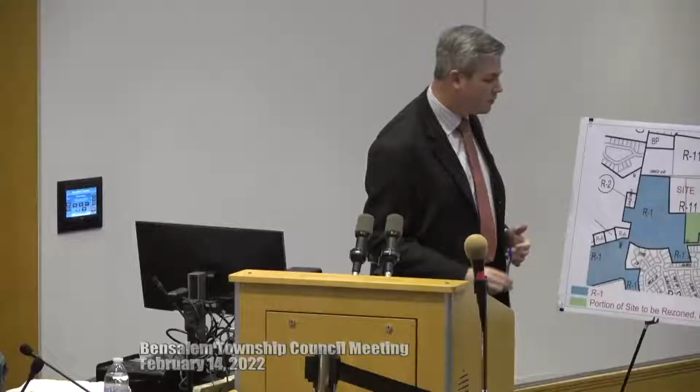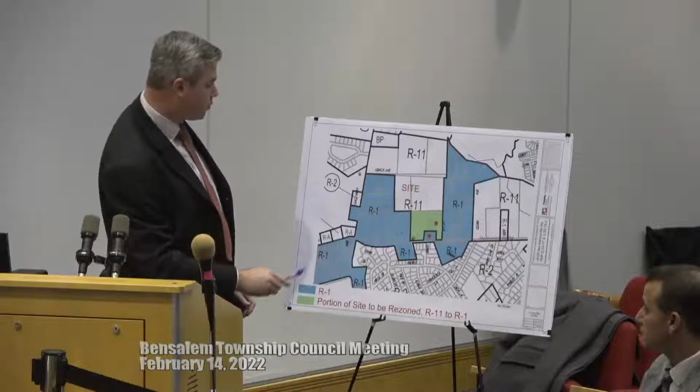Okay, so Matt, you can explain to us what you're doing with the zoning. It's a small piece that needs to be changed, just so to orient council to the property: it's 4020 Mechanicsville Road. It's actually these two parcels outlined in green as the larger parcel, and this green stripe parcel is the smaller one. The larger site, everything in blue, is zoned R1, including the smaller parcel. The larger parcel is zoned R11, consistent with the zoning to the north, where Grace Avenue goes. Our proposal is to rezone this entire parcel, consolidate them into one parcel, and rezone it completely as R1.

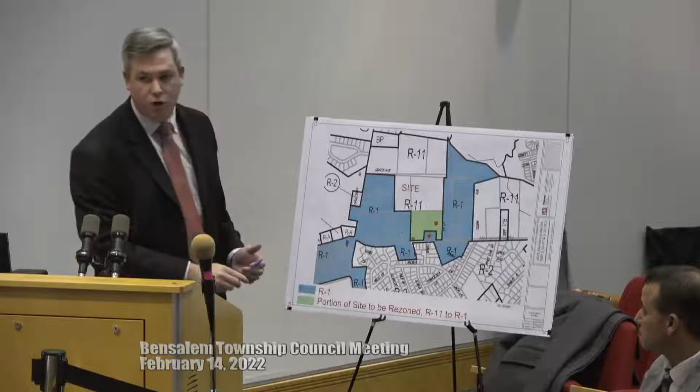And what you can see here is that there is a significant amount of R1 zoning already in the direct area. The properties adjacent to it, across the street, down here, over here, are all R1. So we believe it makes sense from a perspective of good community planning to have consolidated single zoning of R1 on these parcels as they're being developed.

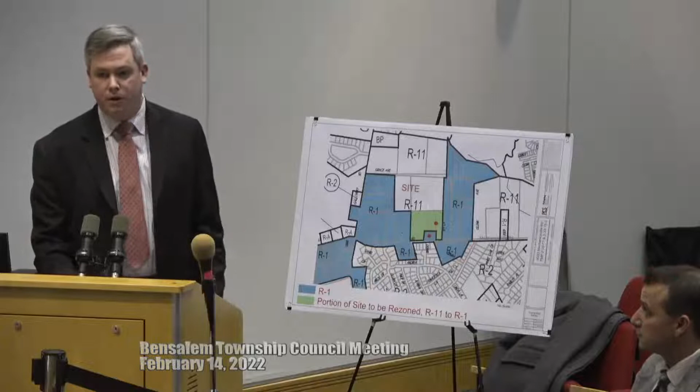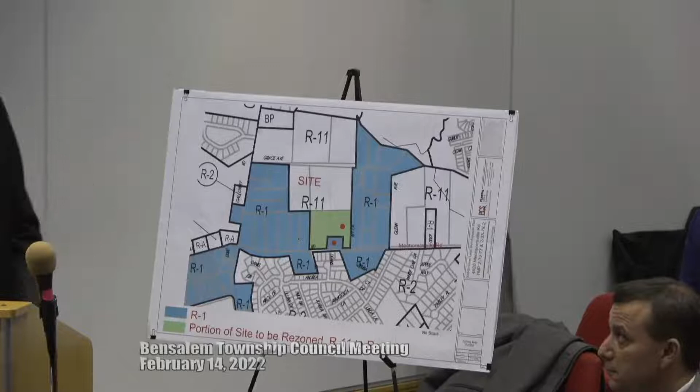And that will allow us to subdivide the property into 7 lots, which is shown on the plan. Right now you have split zoning - R1 and R11 on the site. This would consolidate them into one parcel, making it R1 zoning across the board.

So that, in a nutshell, is the rezoning case, and that leads into what the subdivision allows for. Can I ask a question since you're referring to that? Sure, go back to the zoning itself, if you would.

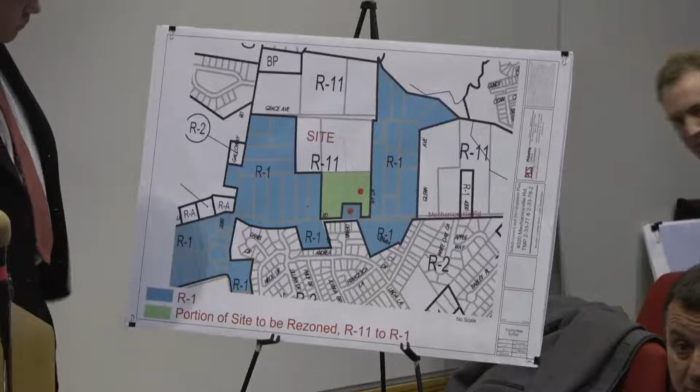I understand and agree with what you're saying. However, if you take the northern part, which is R11, and this middle part, also R11, and continue that down to the green part, which would now possibly become R1 - if that R11 area were to maintain itself as R11, and that little 1-acre area also stayed R11, that would have consistency going from north to south. Am I correct in that?

I think you're correct in that, but when I look at it, Mechanicsville Road is a major road here, and you would essentially have consistent zoning all across this side of Mechanicsville Road at that point, both the adjacent blue and the blue in the center, which is now R1.

That's correct. So the green, which reaches Mechanicsville Road around that other property on both sides - right now this is R11, so you want to make all that green R1. Along with that little centerpiece, yep. So then that whole piece that is green now would turn blue, and you'd have a blue line straight across.

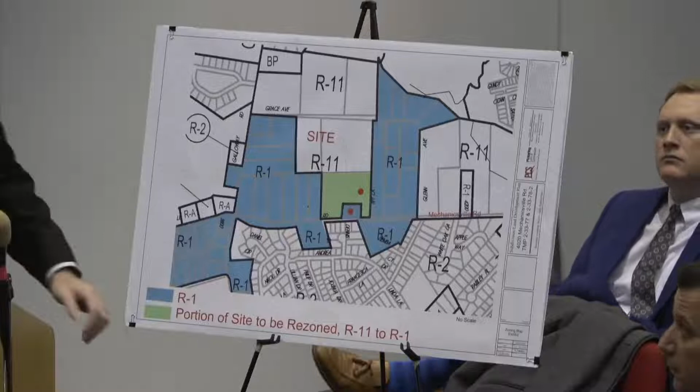And how big is the entire piece? Mark, what's the total acreage? 7.3 acres. Okay, so it's a 1-acre piece, and then so everything along Mechanicsville Road from Glen Avenue all the way to Galloway would be R1, going back to where it was.

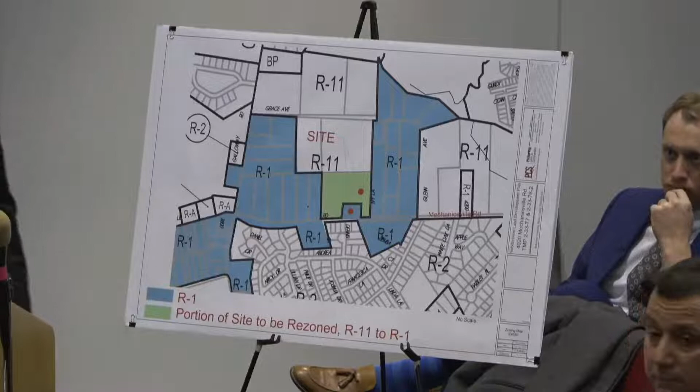The properties on Grace Avenue would then be an R11 zoning classification. Okay, I guess my reason for asking that is from a practical or pragmatic point of view.

Relative to the shape of each individual lot - if it's R1, it's an 80-foot front, where R11 gives you a 100-foot frontage. Correct. Now it would probably eliminate one of the lots. Correct. However, aesthetically, or realistically, it would be more proportional to a lot.

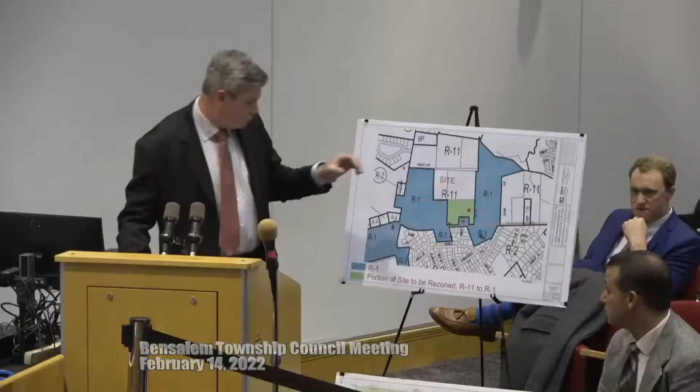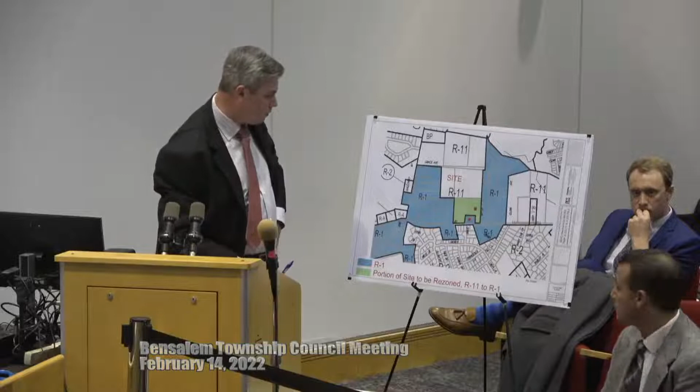Relative to it going - how far do those lots go back? Over 500 feet. So 500 feet makes more sense with 80 feet wide versus other proportions. If you look at the parcels adjacent to it, they're about 80 feet in width also, so these lots would now be consistent with what's currently on Mechanicsville Road.

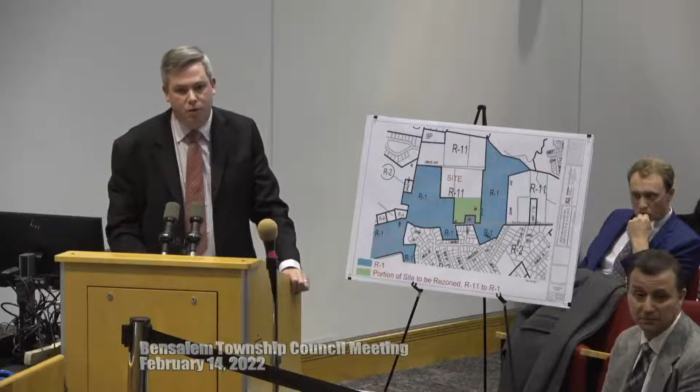I think aesthetically it's got to go one way or the other - either everything's zoned R11 or everything's zoned R1. We prefer R1; it provides us with the 7-lot subdivision and I think it matches the character of the neighborhood. All right, you've answered my question, thank you.

So that's eventually the subdivision plan - it's by-right zoning, so from a zoning perspective no variances are required. It allows for, as Mr. Kisselbeck noted, an 80-foot lot width and almost 500 feet deep lots.

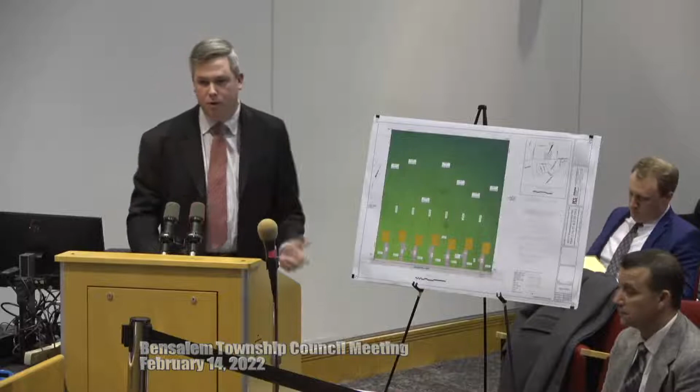That's all still permitted within our zoning requirements, doesn't trigger any variances, the additional impervious, but we thought it was a nice feature to make sure there's no parking on Mechanicsville Road. A couple of people had asked about that. This way you're facing forward when coming out on Mechanicsville Road, so we don't want cars backing out onto it. This provides an opportunity for people to park and turn around so they're facing the right direction, and also prevents parking along the street.

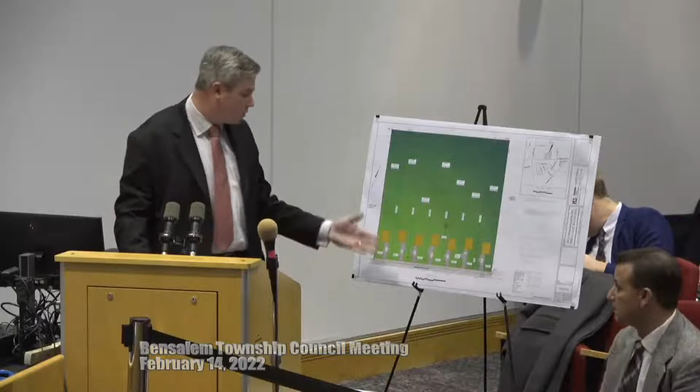So each lot would be approximately 80 by 500? Yes, it's even 550 almost. Okay, so 80 by 500.

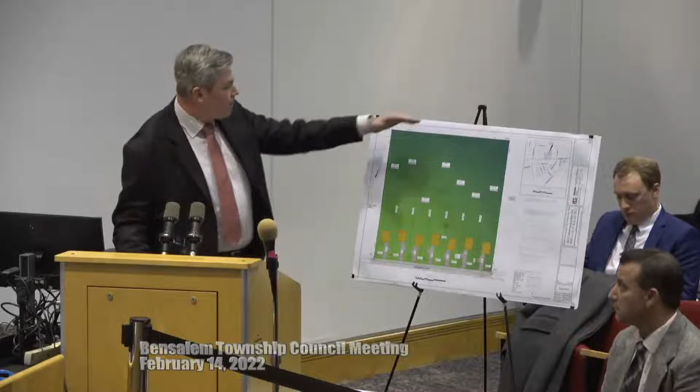Now, there's a lot of vegetation to the rear of the property. We're not disturbing beyond the zoning ordinance requirements, but there is a limit to the amount of trees you can take down on the overall lot. One of the comments in the T&M letter was to provide a deed restriction to make sure no more than the allotted trees are taken down. So we're going to do that, and we'll make sure that deed restriction is incorporated. So you'll see no more than 50% disturbance of the existing trees on the site, and it'll be buffered very nicely to the north along Grace Avenue.

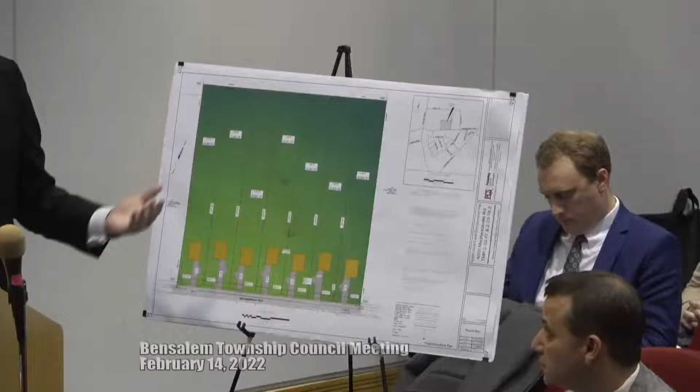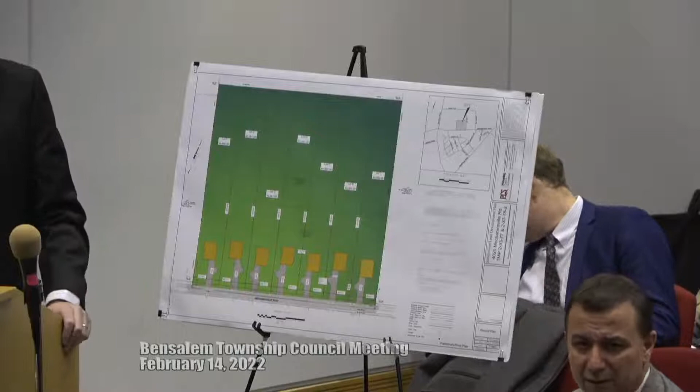Could it also be put in an agreement that there would be so many feet back that could not be disturbed, as opposed to just a percentage amount of 50% of the trees? I'm sure we could accommodate that. The plan right now only shows disturbance on the front half, but we'd be willing to agree to a restriction to that end. The zoning ordinance only requires the percentage, but with a buffer yard, we're providing almost 250 feet before there's any disturbance, I think.

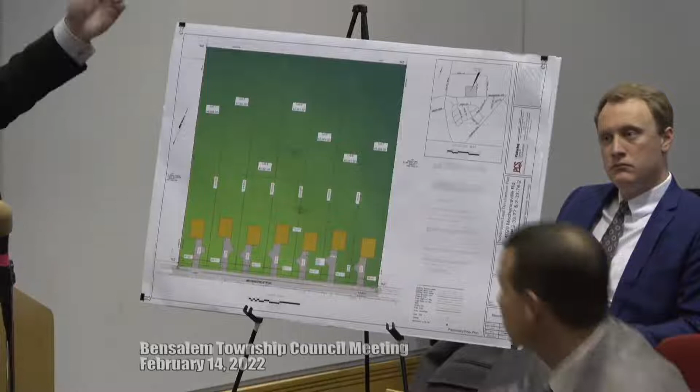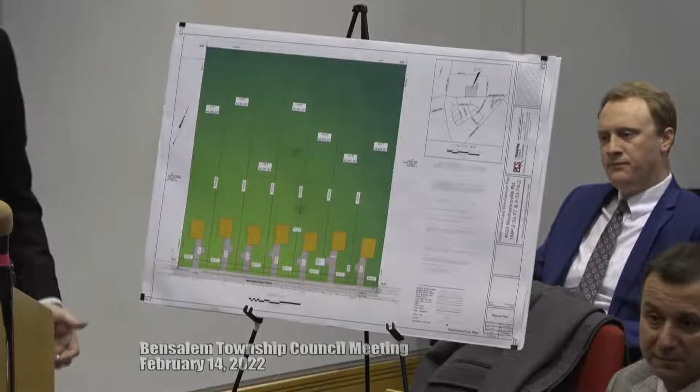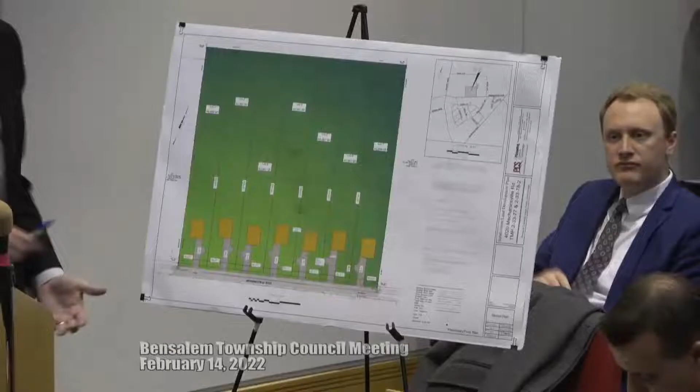Anything else? As it relates to the T&M letter, the latest review letter we had, dated November 10th, 2021, we'll comply with all of the review letters. Every issue we're willing to address. We do have 2 waiver requests, for curbs and sidewalks along Mechanicsville Road. There are no existing curbing or sidewalk along that portion of Mechanicsville Road, so it really wouldn't enhance anything, but we would obviously pay the required fee in lieu of those.

So as determined by our township engineer, you would be paying a fee in lieu of curbs and sidewalks for the future. Correct. Can I make a comment?

Yes, Stacy, go ahead. Being a mother of 2 children who walk on a street that has no curbs or sidewalks, and knowing that recently one of the developments put a sidewalk in for children in another development so they're not standing on the road or in dirt. Many people are walking and many complain about not having sidewalks, so it would be nice to see that starting to happen, especially if there's going to be children here needing a place to stand rather than standing in the driveway, even just to visit their neighbors. I think it would be the time to start.

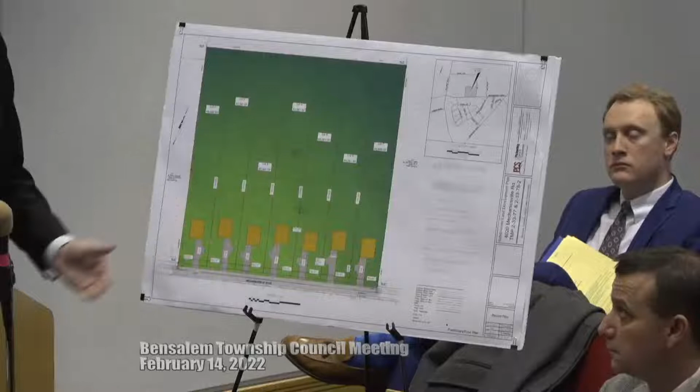It's not just one, it's seven, and I think it would be a good time to start seeing that as we progress along. Certainly, and just because these sidewalks would not connect anywhere, that was part of our consideration in stepping the houses back a little bit, so that pedestrians walking along the road have plenty of opportunity to not be right along the shoulder. But they'll be walking on your grass.

Understood, so I'd rather have somebody walk on a sidewalk than on grass. Is it possible to put curbs and sidewalks if chosen, since you're paying for them anyway? Sidewalks and curbs create more drainage problems. I'm concerned about the drainage. You need a drainage system, so it just compounds itself.

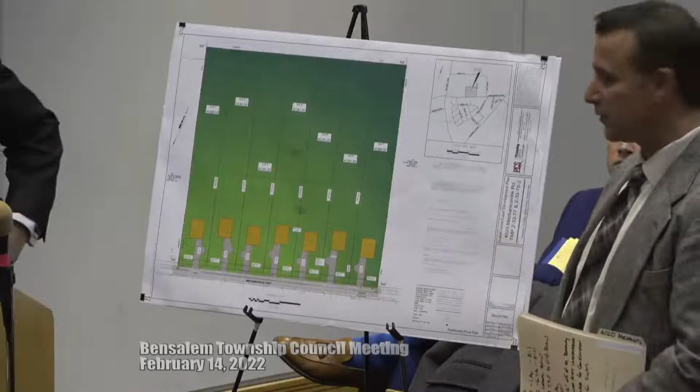Sidewalks, we can definitely look at that. I'm getting the okay from my client, they're willing to remove that waiver. They'll put the sidewalks in, Mr. Chairman, at least, and then we're still asking for the waiver from the curbs.

Even if they don't have to walk anywhere, like Ms. Champion said, at least if they have children standing for the bus. If that's the preference of the township to have those sidewalks, then we're happy to put them in, and we'll do the fee in lieu for the curbing.

That's correct. Okay, so is there anything under the zoning ordinance, under subdivision, that's all? There's no other, yeah, we will comply. We either have addressed in our revised plan or will address in a future revised plan all of those comments. Most of those are stormwater management things, just minor calculations, and we're committed to work with the township engineer to make sure they are compliant with the zoning ordinance.

As far as the stormwater management, once we get to it, it looks like you're reducing most of the flows at the site from what they are now. Correct. So you're complying with that section in its entirety, everything from 1 to 30?

And then we go into stormwater management, so they're all one plan, they all comply, right? Yes, the whole letter is a will-comply. Is that correct, Bill? Yes, Mr. Knowles, the only waiver is the curb, and everything else is a fee in lieu for that. All else will comply, so we feel that at this time it's able to be considered for preliminary and final approval, with the revisions to be made at final plan approval.

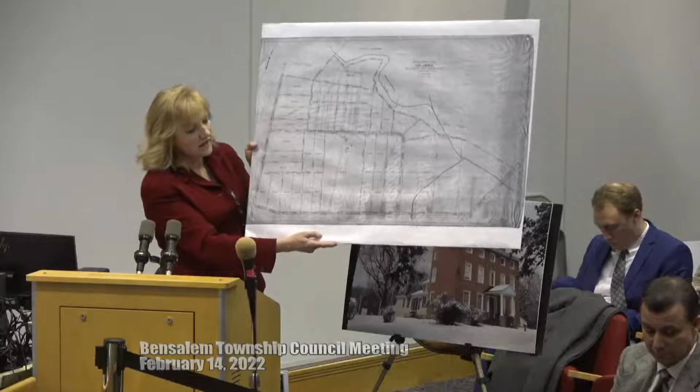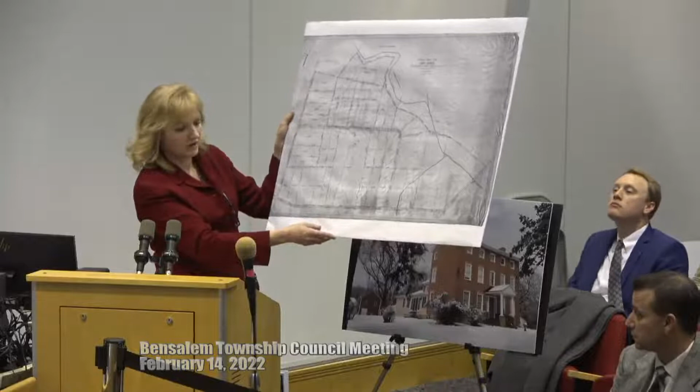And my grandfather, he had the sign on the front. That's why the address was 3972 Mechanicsville Road. That was the entrance of the lane. And this is what the lane looks like today, still a natural setting.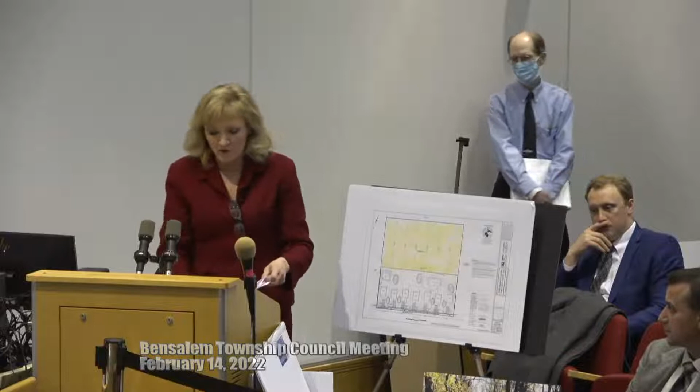Now, with the zoning, the property is zoned R11, and if you look in your booklet - I know he mentioned many of the front properties are R1, but many of the rear and to the side properties are still R11. The R11 residential statement of purpose says that R11 districts are designed to provide low to medium density housing, et cetera. They provide for the preservation of natural resources and environmental features that are unique to each R11 district, consistent with the section of this chapter, and to provide an adequate buffer between each R11 community and the surrounding districts. The R11 district recognizes the need to preserve open space and environmental resources for residents.

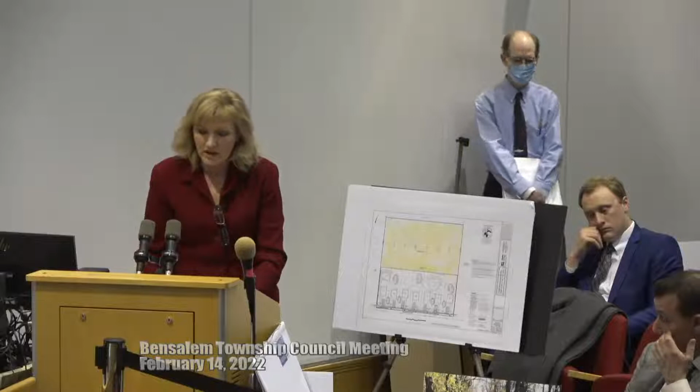So I am against subdividing the original lot that was my aunt's property, which was given to her when she got married in the 50s from my grandparents. I'm not against maybe just zoning the front half where the houses are R1, along with my former aunt's property, and maintaining - here he has his line of disturbance.

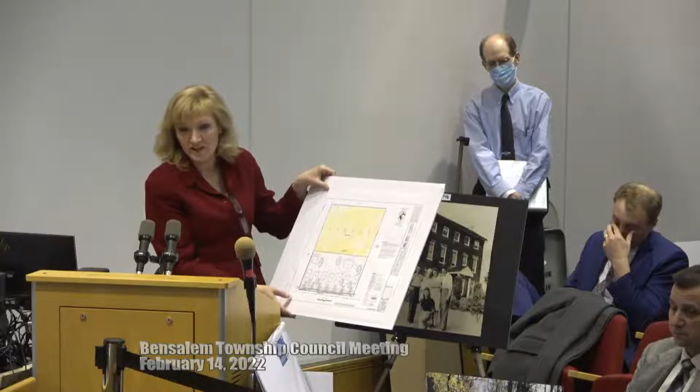Yeah, that's what it said - limits of disturbance. So as we know, houses in Bensalem sell with land. Look at Justin Circle, look at Derby Lane, which was the most recent development, and they get the high price. So I feel it's important to keep this remainder part R11.

It could be donated as preserved open space to the township, or it could be subdivided right here. And I don't think it was mentioned that in the developer's plans he's calling for an HOA. So with this sort of property, it will be very expensive for all the homeowners, constantly giving into the homeowners association to maintain this. It's also mentioned that the township would be inspecting it every year. Well, if they're going to be inspecting it, why not just donate this as preserved open space to the township? They would have access through my historic driveway easement.

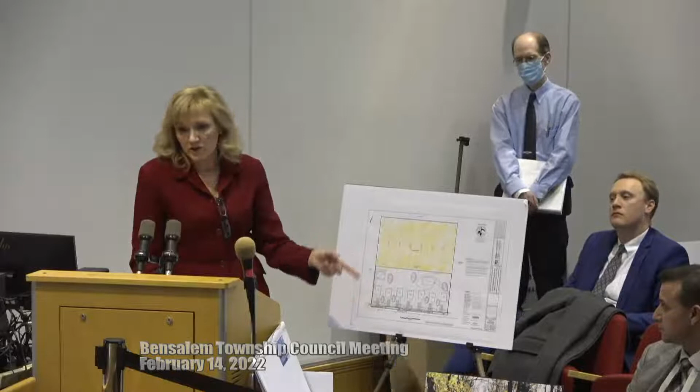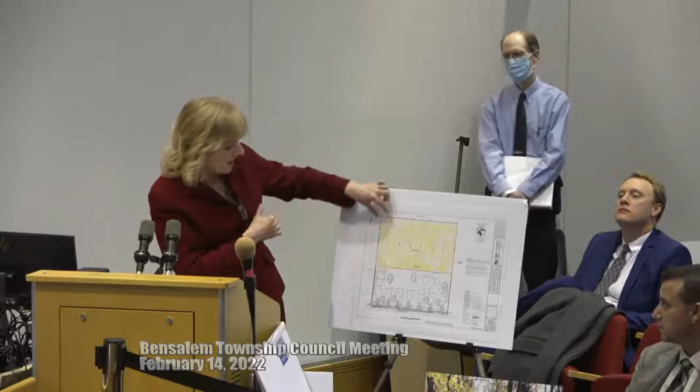And otherwise, I don't really see a homeowner - they usually buy a house, you pay for the house, you pay your taxes. They're not going to be interested in a hefty HOA fee trying to maintain the woodlands. Many homeowners do not want the responsibility of big old trees and maintaining them. What if one tree on the skinny toothpick lot falls? It just sounds like it could lead to a lot of issues in the future.

As opposed to just subdividing the front R1 and leaving the back half R11, which ties in with the whole quality to the R11 status. So yeah, I think that's it.

Really? Yeah, that was a comment, I think, originally. The only common elements are going to be the stormwater management controls. They're going to be owned by the individual lot owners. So the lot owners will have to pay to maintain the big old trees, and they're not going to be allowed to - there's going to be deed restrictions not allowing them to disturb those trees. Then who maintains the trees? Well, each homeowner would have to, yeah.

Will that be in the deed? So what if it becomes neglected? It's like, same as if anybody owns a property parcel, they're not required to maintain their property... yeah, but even this, like, the shape of the toothpick.

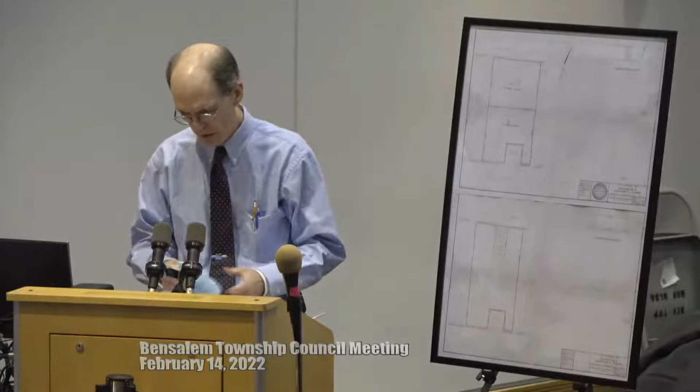Is there, sir, you want to make a comment? And you can identify yourself for the record. Yes, sir, I will. Good evening, council. My name is Robert Homolka, and I reside at 3213 Whitney Court in beautiful Bensalem, PA.

Currently, I'm against the project as it stands. As a current member and former president of the Historical Society of Bensalem, I was contacted by Ms. Roman to assist her in filing for a National Register of Historic Places status for her historic home at 3981 Grace Avenue, which is directly behind the applicant's property. During the research process of the history of her home, some documents turned up directly impacting the subdivision of the applicant's property at 4020 Mechanicsville Road.

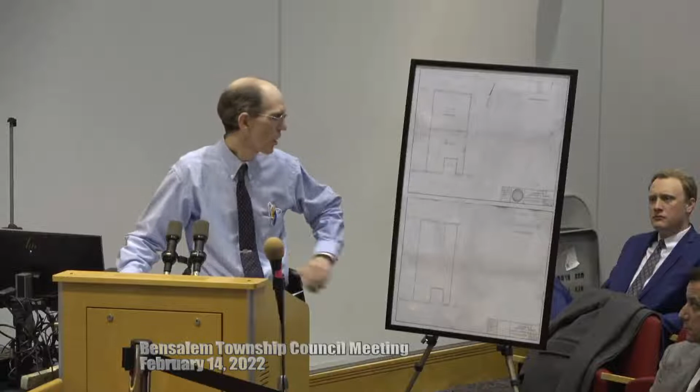Namely, Ms. Roman appears to have an easement directly across the applicant's property. This easement is not reflected on the current subdivision plans brought before council here tonight by the applicant. In fact, Ms. Roman has filed a quiet title action complaint with Bucks County Court. It appears Ms. Roman has legal and historical standing concerning this easement based on the documents at hand. These documents are maps created in 1983 that clearly show there is an easement across the applicant's property, and you had those in your handouts that Ms. Roman gave you tonight—these particular maps.

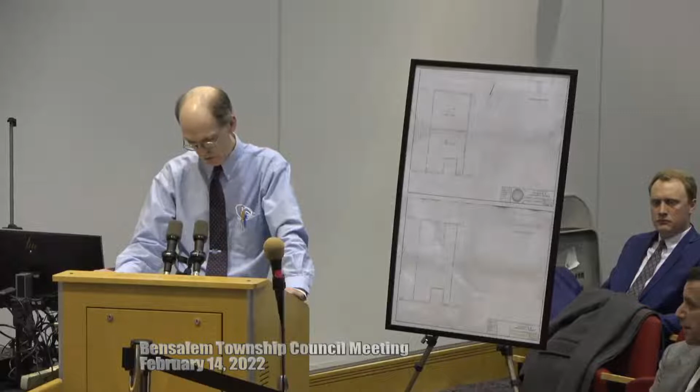The easement in brief is a gravel driveway, often referred to as the lane or Green Lane by the Roman family since the 1940s, leading to their farm across the applicant's property. The maps presented here tonight from 1983 clearly note the easement in question—there's a note right on this map that clearly states there's an easement across this property.

Okay, but Ms. Roman has legal counsel. Yes. In reference to them going to court about this. Yes. We already got a letter mentioned from... excuse me? I've already mentioned that, sir. Okay, well, you're not her legal counsel, right? No. Okay, so she has legal counsel who wrote us a letter agreeing to what we're doing, and then they're going to go to court and resolve it, so we can't resolve it tonight.

I'm not trying to resolve it, I'm just trying to make a point, sir—make you aware and make points. Okay, is there anything else? Yes, sir, I still have more to go. Okay, go ahead.

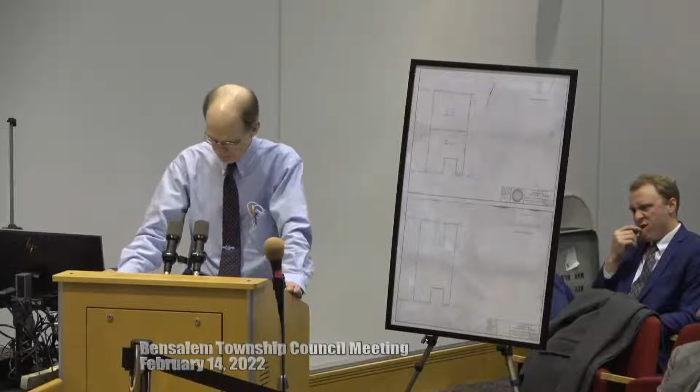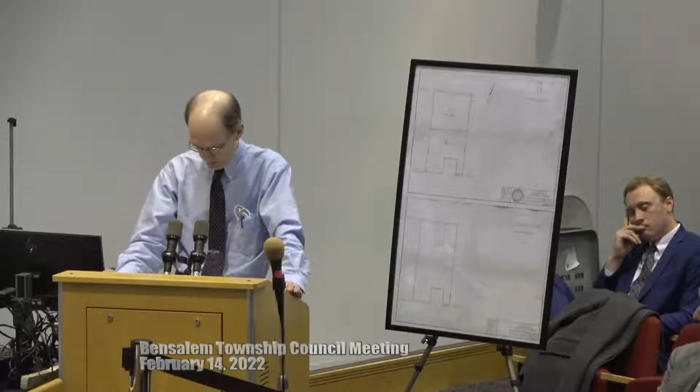The easement has historic and intrinsic value to Ms. Roman, and the loss of such an easement may negatively impact the value of her property and the National Historic Registry status. But even if you put aside the historical aspects of this case, I find it highly prejudicial that this applicant's 144-page filing to the township never once mentioned that the easement is before the Bucks County Court.

So there are three additional non-historical points I'd like to make in this case. One, the court case before Bucks County Court concerning the easement must be meritorious, or the presiding judge would have already thrown this out of court.

Excuse me, may I interrupt you for one moment? It's been presented to us that we know this is in court and it's going to be litigated, and there are two positions - one is the developer and one is Ms. Roman - and that's going to be determined in court, which will then change the proposal accordingly in favor of Ms. Roman or not. So we're aware of everything you're saying. Both counsels already agreed - we got a letter from Ms. Roman's legal representation saying they agree, both counsels talk for both sides. We're aware of this, we're not denying that there's a legal battle or court hearing.

Okay Joe, should we? The only thing I would add to what you've both just said is this plan does not propose the demolition of any historic structures or structures that may potentially be placed on the National Register. The Doric Hall is not touched by this plan. The question is whether the access lane from Mechanicsville back to the property legally still exists as an encumbrance on the front parcel or it doesn't. Again, that's what the legal question is. The property is not otherwise landlocked - the Doric Hall property does have frontage on Grace Avenue, so this isn't a situation where you potentially could be landlocking a property.

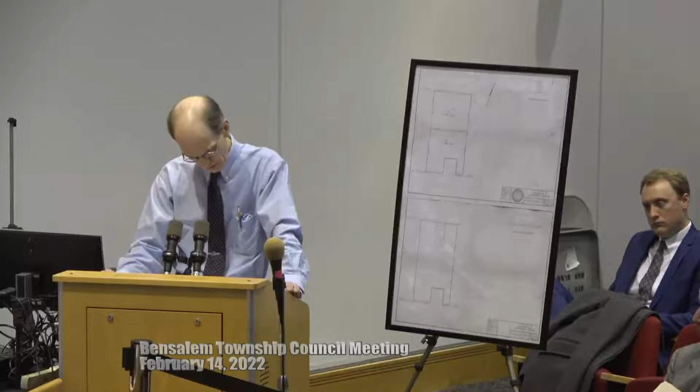So therefore, in my opinion, this council must deny this applicant any preliminary or final subdivision of this property at 4020 Mechanicsville until a decision is rendered by the court. In addition, I'm formally requesting a roll call vote from council for the record, should there be a vote taken here tonight. A roll call vote. Okay, I understand.

Mr. Malika, you said you're from the Historical Society? Yes, I'm a current member, and I'm a former president and vice president of the Historical Society, Bensalem. Okay, thank you. And you said this could compromise the historical standing for this property? She has filed for a registry status, and she's currently about halfway through the process. She has what's called a blue card from the state, and the original paperwork filed included the lane. If this lane or driveway is not included, she may have to refile her paperwork and start over again with the state.

Okay, but that's not going to compromise her property's historical standing in the newer version of this. If the court decides she has the lane, then she'll have the lane, so she won't have to refile. But if Bucks County Court decides she doesn't have the lane, then she doesn't have the lane. I agree. So it's separate from the historical quality of her house.

Yes, but what I'm saying is the paperwork was filed some time ago when the lane was included, so she'll have to do a historical review. You can't just do an amendment? But she'll have to do that if she loses the lawsuit, in any event. So what you do here has no effect on that. Right, no, I completely understand that. Do you have any other points? We appreciate you coming out.

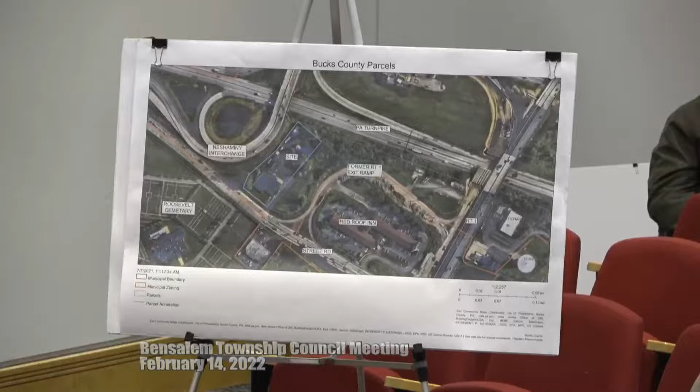In furtherance of that effort, the applicant appeared before your zoning hearing board in July of last year to receive a number of items of relief, which the zoning hearing board did favorably grant. Thereafter, we appeared before the Planning Commission at its November meeting, at which time the Planning Commission unanimously recommended the grant of both conditional use as well as preliminary and final land development, along with all associated waivers therewith, which we'll touch on, will probably bleed into the land development a little bit.

With respect to the conditional use, however, there are two use-specific criteria that the ordinance sets forth in order to be entitled to the conditional use approval. Both of those were the subject of variance requests, the first of which is to permit the property to be located on less than 5 acres in area. I think that's probably a vestige from your old sprawling, single-floor, pull-in self-storage facilities. Now they are integrated, vertical, able to be accommodated on much smaller than a 5-acre parcel. That was one of the items of relief, and that is also one of the conditional use criteria.

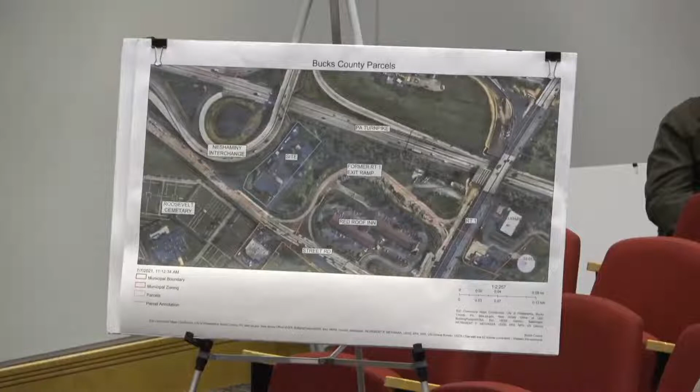The second had to do with the hours of operation. We extended them 1 hour earlier and 1 hour later, from 6 a.m. to 9 p.m. So with satisfying those two criteria, we've demonstrated, or would demonstrate, compliance with the lone use-specific conditional use criteria.

We are also in receipt of the T&M review letter dated February 8th, 2022. I'm pleased to report that all the items contained in there will comply, with the exceptions of the waivers, which I'm happy to run through very briefly.

If it please, I'll take my direction from the board if you'd like to push that to the land development. That's okay. So you discussed the size of the building, and all the zoning variances were received that you needed, right? That's correct, yes. Okay.

So on page 2 of the T&M report, it lists 5 items that you need waivers on, right? The first one is street trees to be planted by the developer along the street. Suitable street trees do not exist, okay? So you want a waiver for that?

Yes, and just to be clear, we're not seeking a waiver to reduce the number of street trees. It's the interval at which they need to be planted. They're required to be planted 20 feet apart, and due to some existing utility lines, we're not able to accommodate that spacing. So it's exclusively for the spacing of those trees. All the street trees will be planted. It's not a number of trees issue.

So the number, and that's fine, for me anyway. But the number of trees, you don't need a variance, or you don't need to pay for trees that you're not able to plant. That's correct, they have the correct amount of trees. So that's just the spacing, and you agree with that, right, Phil? Yes. Okay, and then number 2 requires sidewalks along Street Road, which you probably wouldn't want.

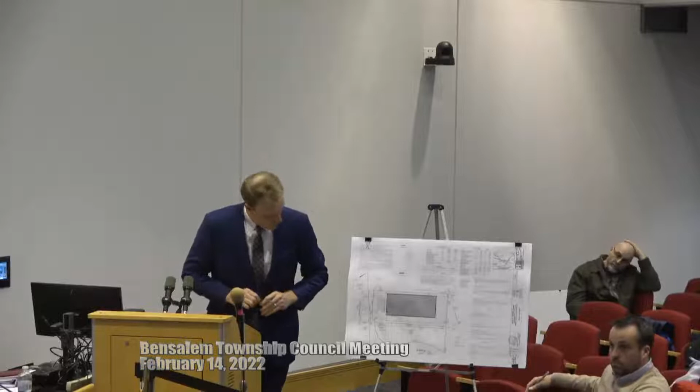Now, is there, for lack of a better word, car stoppers or some kind of stoppage? Well, this is a fire lane, and we do have interior parking being accessed from that. So certainly not in this area, but there's no parking contemplated there. It's purely a function of the drive aisle, the fire lane, being included in the definition of parking area. So it's not parking spaces themselves that are abutting the property. Yeah, we don't see the need for bollards, if that's what you're asking. Okay, there's no need for that?

Okay, that truck, I can't see from here too well, but the truck in the picture below, isn't that against the property? From here it looks like it's against the brick wall. Well, in this image, it is, yes. This is illustrative of the building itself, but not necessarily our layout. Okay, good question. Yeah, I thought maybe I was seeing things, it looked like a truck next to the wall. No, fair point, I apologize for not clarifying. This is another location which was just opened up, which would be fairly representative of the general look of the building, but not here.

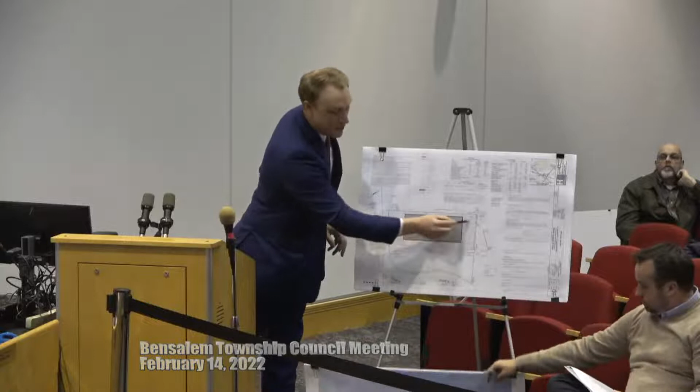Okay, correct. And can a car turn around in that lane? Well, they have the rear area to turn around. So were they coming up, going around, and turning around there? Correct, and the primary access for this lane would be to access the interior loading bays, or the interior parking spaces, to unload your stuff. So you'd be principally pulling in here and then backing out and coming out. But if you did find yourself in the rear of the property, there'd be ample room to turn around.

So there are like 6 bays, I don't have it in front of me, but is that correct, like 6 bays? So when you go in and park, how do you get your stuff to the bins, or whatever you call that? Well, there are interior elevators, it's a loading area or unloading area, where you would come in and be able to shield yourself from the elements in doing so. And would that accommodate a fire truck going in and accessing that if there's a problem? The drive aisle, yes. Okay.

Okay, so are those spots underneath, or is there a door you open to get to those spots? Or are they built into the building? Just trying to understand - would they be open, with no garage door look? Or would there be flooring above them?

It would be flooring above them - it would be the first floor of a 3-story building, so the second and third story would be above them. Okay, because it's hard to visualize that otherwise.

And then the inside of the units where you store stuff, is that climate controlled, all of them? Yes, the entire structure, all inside, all climate-controlled units.

How many units? I don't know that we have that figure yet - it could change depending on the size. Microphone please - you need to come up here if you're going to speak, and introduce yourself.

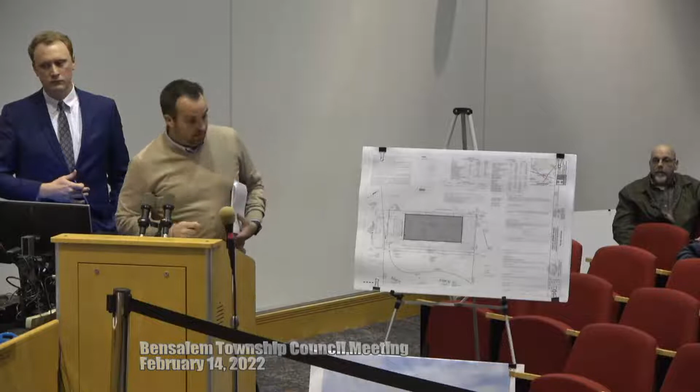The traffic generated by the self-storage use is significantly less than when it was an industrial facility, so it's a reduction in traffic. We understand the kind of location it's in on Street Road, and we thought this was the appropriate use from a traffic standpoint for this site due to its low volume of traffic. Sure, my question was regarding the parking - I understand it's within means, but 7 parking spots, one of them is an ADA spot, right?

That's all that you have? How many employees are in the building at a time? There's a maximum of 2 employees in the building at a time. The spots in the front are for new patrons.

Excuse me - according to CubeSmart, they actually only need 2 additional spaces, so they'd only need 4 spaces in the front, and the 6 loading spaces are all that they need. There are only 2 elevator shafts, and to run 2 elevators, the most you would need is 6 loading spaces. Thank you.

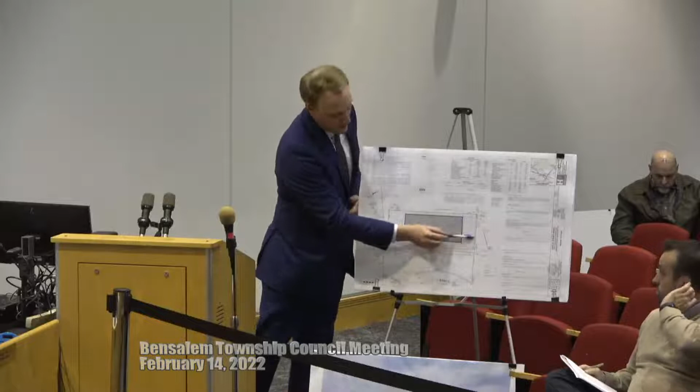Okay, and then number 4 - except that the entrance and exit drives, all parking areas are set back from future right-of-way lines, all property lines, by at least 15 feet - so you need a waiver for that? Yeah, and again, that's a function of the classification of the drive aisles as a parking area, particularly from the turnpike. The right-of-way for the turnpike extends into the property, and as you can see, we do have some of that turnaround area from the turnpike right-of-way.

Did you say you have 4 parking spaces up front? I have to back up - is that what you said? 7, there are 7 spaces in the front of the property, and there are 6 loading bays.

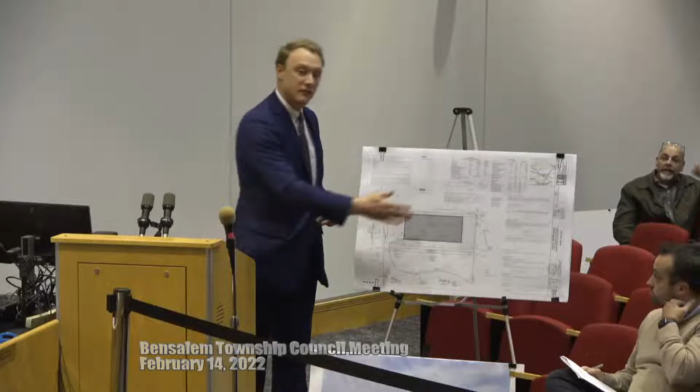So as Mr. Cunningham alluded to, it's 13 total - the front 7 would be principally for signing up, and then the loading bays would be for in and out. Right, and you don't get that much in and out, is what you're saying? Minimal traffic.

Okay, and then number 5 requires a retention basin to be designed using the TR55 method. I have no idea what that is. Yeah, that's acceptable - that waiver is common for small sites, especially when PennDOT's involved, like this one will be, so that's perfectly fine by our standards.

To comply with anything PennDOT requires? Yes, they'll need a PennDOT highway occupancy permit, which they know about - it'll already be a condition, and part of the will-comply. All 5 of these, you're okay with? Yes. Okay, can you elaborate on it a little bit more, Phil?

I hate to take your time, but what is that method? The township has a requirement for something called TR55, which is a method of determining what the runoff is and how to store it. Using a smaller method might determine that you have less area to store, so you'd use it in a small lot type of environment, which is what they're proposing.

Our method has something where, if you use that, it would make you have larger basins than you really need. So we use that for larger types of projects, more than one lot, over 5 acres, things like that. This is what PennDOT requires as well with regard to their stormwater runoff, and that's pretty much what this whole area is, PennDOT. It's not a lesser type of stormwater management program, but it's a little bit more lenient with regard to small lots. That's the best I could describe it.

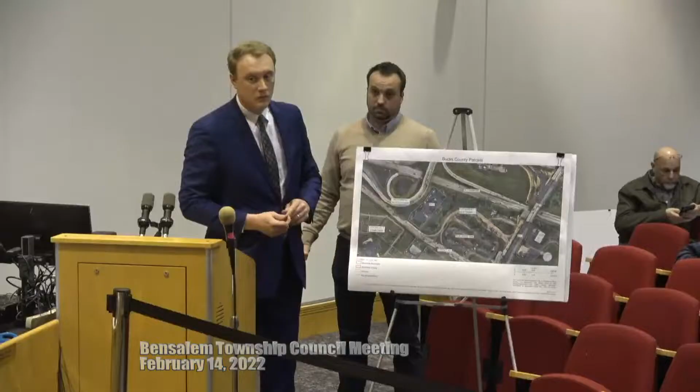Then I have one more comment. I know you had said 5 acres, and I understand there's a lot of property around it that's kind of been taken either by PennDOT or is in discussion that may have come through during the zoning. I didn't get a chance to read the minutes, I could not find them. But that lot next to the off-ramp there, will that maintain open space? I know it's not part of your lot, but I'm concerned about the impervious surface and the water runoff, and how is that going to play into the future?

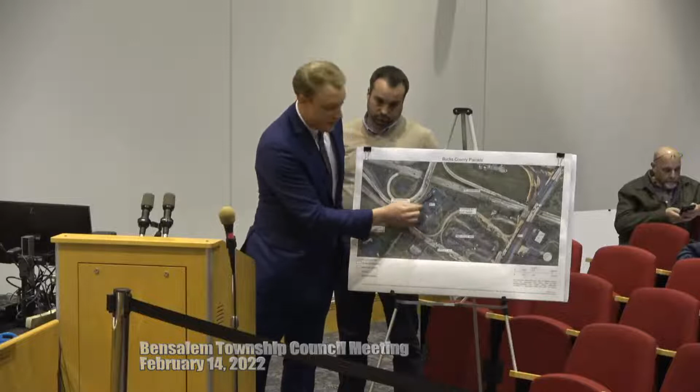The applicant does own this lot as well. You probably can't see it from there, but there is a 15-foot wide lot that separates these two lots, which prevents us from incorporating that into this project. I can't say it will remain open space in perpetuity, but it is not contemplated in any way with respect to the instant project. It will remain a vacant lot for the time being.

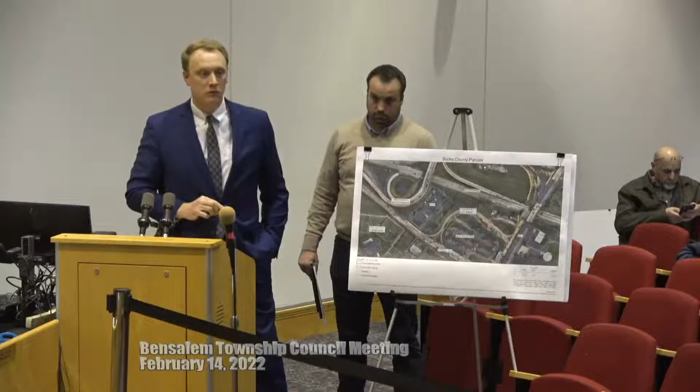Okay, what's the zoning on that lot? The neighboring lot? He owns it, he owns it. So, okay, then they would have to do some sort of easement, because looking at that, it looks like the ramp is going right in front of part of it from here.

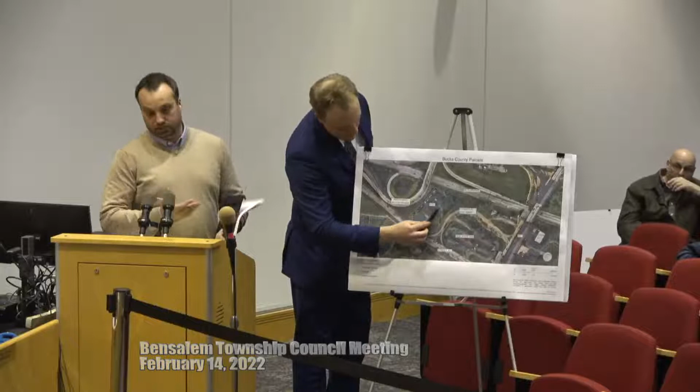So I'm concerned that we're going to have more impervious surface coverage pushing into a small space. Did PennDOT have an easement on that piece of the property? It isn't an easement - PennDOT owns the property between the two properties. There's no way to incorporate it; we've had discussions originally, but PennDOT has no interest in selling it. It's our understanding that maybe the water line that services the interchange goes through that area, so they are not open to discussing anything with that property. So these two properties would be separated forever unless PennDOT decided to sell it.

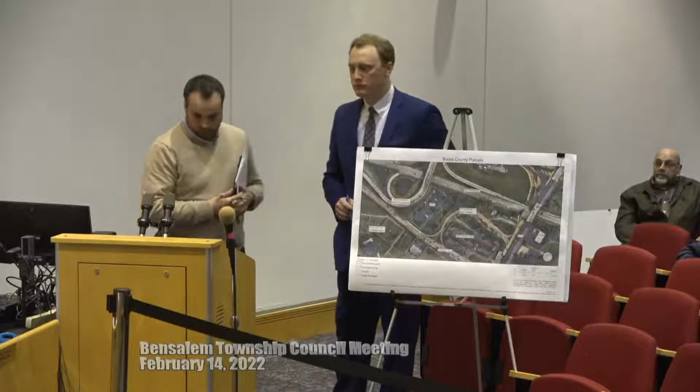Mr. President, we spoke with PennDOT as well during this process, and it was just - you would have to move the earth to get an easement released from them. So it was next to impossible. All they had to know was there's a potential water line in there, and they said, well, we're just going to keep it. So we'll keep it, it'll be open ground for now.

Okay, so the next page is conditional use review. Are these all accepted with the other things? You have the use-specific criteria, which I mentioned at the outset, as well as the general conditional use criteria. After this, under the zoning, have all these comments been addressed? So everything else has been addressed under the zoning - all will comply, yes.

And then you get to the stormwater - you have the two stormwater studies. The stormwater looks like it's being reduced significantly from current conditions. Want to address that? Sure. Most of the stormwater from the site discharges into Street Road. We're installing a subsurface basin under the parking lot in the front, which is going to capture most of the stormwater off the building and discharge it again into the Street Road right of way. That's a significant reduction in the 100-year storm - we're going from 10.77 CFS down to 3.85. So obviously we're sensitive to the drainage problems everybody's experiencing.

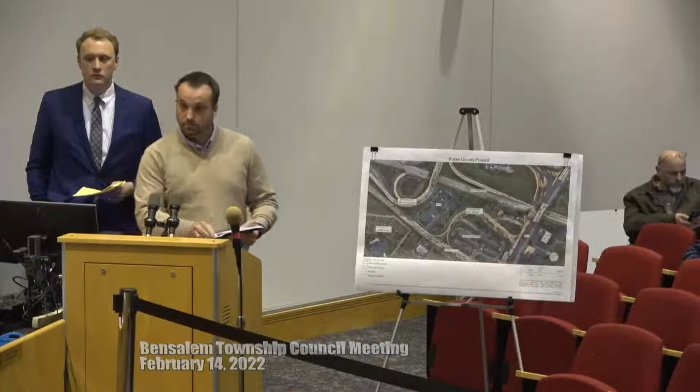This isn't the first facility you've run of this kind? That's correct. So you have other facilities like this that you run, these interior temperature-controlled facilities? Yes - the applicant does, not me personally.

Okay, is there any other questions from the council? Yeah, on number 21, I assume that they're requesting a waiver on the sidewalks. Yes, that's correct. They did say that - they're going to pay in lieu of, they're willing to do that.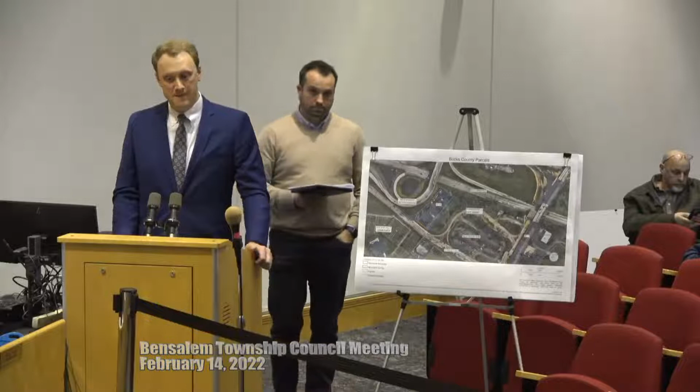Okay, as far as the fire rescue department, the turning around design - this is like a letter, but it doesn't really say that, I'm sure that you're complying with any requirement of the fire marshal. Is that correct, Phil? Yes, that's one of the letters - all three letters will comply from the applicant. Okay, because it didn't really say that in the letter. Oh, no, you're right.

Okay, so we have a conditional use and preliminary and final review. Is there anybody from the audience who wants to speak for or against this project? Seeing no one come forward, unless there's any questions - Mr. Pizzo has a question. I have no question, just some housekeeping.

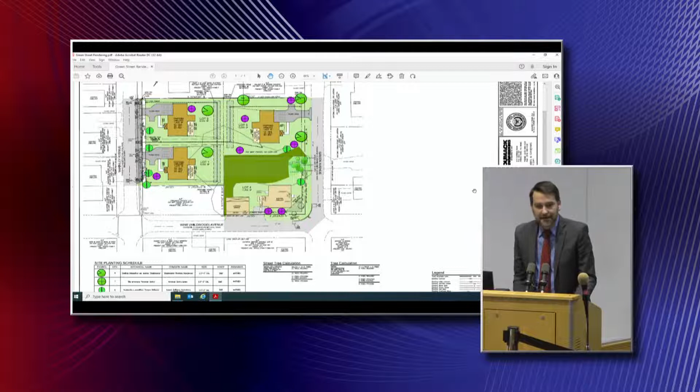My client, Tom Snyder, is here. He has built houses in the township previously, and he would like to continue building houses in the township for the next 30 years, hopefully, so he's committed to delivering a good product. With that, I'll turn it over briefly to have John do a walkthrough, and then certainly if you'd like to hear from Tom, he's happy to address council directly. So thank you.

Good evening. Just a little overview that Mr. McGinnis didn't hit on: the site drains to the northwest corner. There's a little bit of Green Street that kind of runs away from Wine, but the majority of the drainage in the area drains away from Wine towards the predominant northwest corner.

As part of the development, we're proposing 3 underground dry wells, which are stone pits underground where the water will be directed and will infiltrate in. There is an existing storm line that runs down McKinley.

The proposed dry wells will tie into that existing storm line. At the Planning Commission, the representative from T&M had said that while at the time we were asking for a full waiver of sidewalk, curb, and street widening, he was concerned in regard to McKinley specifically. He asked that along McKinley we do the street widening, the curb, and the sidewalk.

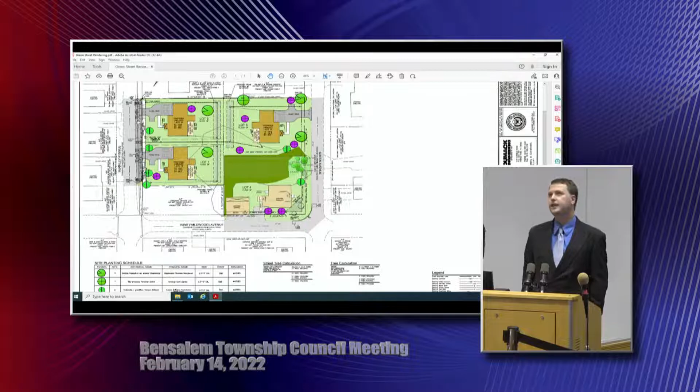As part of the curb along McKinley, the drainage is such that we're proposing to place several inlets along the existing storm line there. Once you put in the curb, you channelize the water, you've got to let it go somewhere. So as part of the condition at planning that we put in the curb, sidewalk, and road widening, we're going to be upgrading the stormwater there slightly.

As part of the land development, we'll be doing some landscaping. There is a section of woods in this area that we're proposing to maintain. And additionally, the area closest to Green, there's some invasive species in there. We'll be going in there and tearing out those invasive species.

Okay, and then on McKinley, so you're putting curbs and sidewalks on the 2 frontages on McKinley? Correct. Okay, and then do the curbs, can the water that goes against the curbs go somewhere? So along McKinley there's an existing storm line, and we're actually proposing to tie into that existing storm line with several inlets along that curb line.

Okay, and then you're just putting a curb at the radius to the existing property on the corner? Correct, so it would just be a little taper on each end and just along the radius. Okay, and that's a corner property, so that actually has 2 front yards, so you're doing curbs and sidewalks for both fronts?

Correct, so we're currently asking for waivers and fee in lieu of along Wine and Green, with the exception of that little piece of tangent. So the answer is yes, that whole area that's not improved, we're agreeable to pay a fee in lieu for that entire strip, except for the curb on the corner and then the curbs and sidewalk.

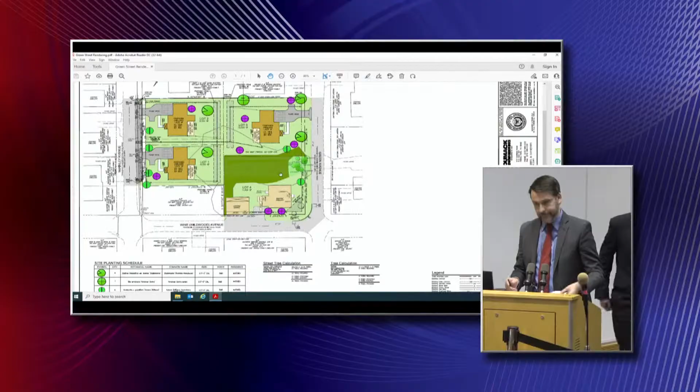No, everything else is a will comply. The waivers are what's identified in... Okay, so you have the T&M letter dated February 1st, right? That's the one you're working off of? Same one we have, yes.

Okay, so under subdivision land, are they all will-complies on the front? Correct, everything is a will comply all the way up to comments 19 and 20, which is where the waivers are addressed. Besides the curbs and sidewalks, what other waivers are you asking for? It's the partial waiver for the street widening. So basically there are partial waivers with respect to the curbing, sidewalks, and the cartway widening.

The only other item worth bringing up from a housekeeping standpoint is in comment 20 of T&M's letter, which deals with sidewalks. I'll just read this: if a waiver is granted, applicant shall pay a fee in lieu of sidewalk installation, which we're agreeable to. There are no existing sidewalks in the vicinity of the site. And then it says SALDO section...

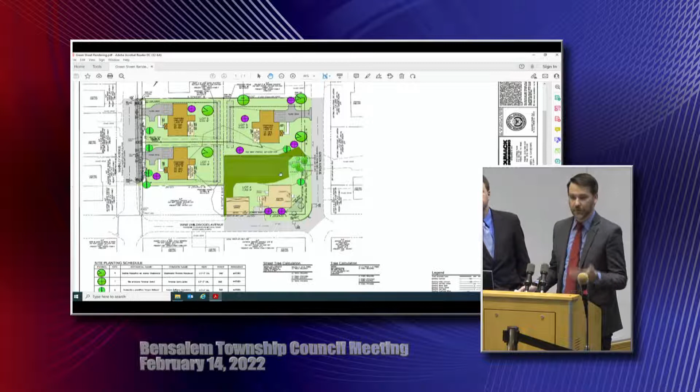201-111B states there shall be a minimum 4-foot wide planting strip between the curb and the sidewalk. That is part of a section we're asking for a waiver from, 201-111, anyway, but just in the interest of clarity, I'll have John address that. That would be the only other waiver request, under 201-111B, for the planting strip.

So that comment is in regard to this area along here. With the current right-of-way we're proposing to offer for dedication, there's not enough room for the sidewalk to be set 4 feet back from the curb. In our opinion, the road there is not heavily traveled. There's currently an isolated piece of sidewalk. Pushing the sidewalk even further back into the property almost makes it feel like it's part of the property, not part of the community. So we're asking for a waiver to allow the sidewalk to be tight to the curb instead of 4 feet further back into the site.

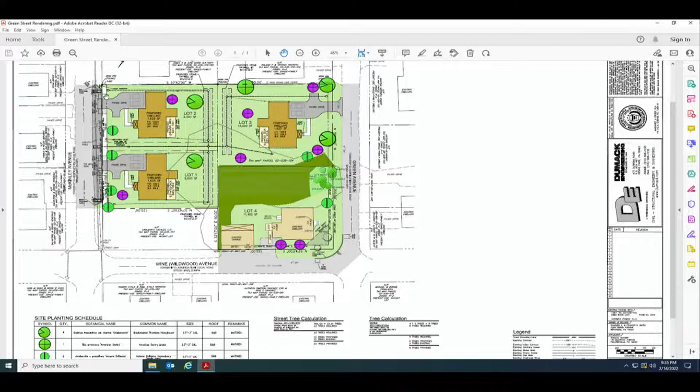Okay, are you okay with that, Phil? I just have a question regarding the sidewalk. I wasn't at that meeting, and that was before my time here, but the sidewalk butting up against the curb is just not a great look, and that's the only sidewalk around—I don't think there's any in the whole community. You mean, why did we even install the sidewalk?

Right. First, I understand the curb because of drainage—usually it's the other way around, the sidewalk we'll take and forget the curb. So my question is, why that particular one? And if this was going to be the first one in the neighborhood, why wouldn't we do the rest of them as part of this lot? I don't want to belabor it because it's not very consequential, but I would almost say put the curb in and just plant grass there, or else it's going to look just... I mean, people will use it, but...

They recommended the sidewalk—the engineer, T&M, which wasn't on board at the time. Right, so that's just my question. The planning commission, but I don't know why the planning commission wanted a sidewalk there. I don't know that the planning commission members by themselves insisted on it. I think it was a comment to Russ regarding his review letter, and he had suggested the installation of sidewalks there.

Would the curbing along McKinley help the drainage? The curbing certainly will, their engineer spoke of that as well, as far as adding inlets. We're always looking for stormwater improvements, so that's great. But I want to be respectful with regard to council's recommendation on sidewalks, since we're trying to make things more walkable—but this is a tough one. It's in the middle of nowhere, right? Right, it's a nice community of all grass. Even the curb, which I'm in favor of, it's like the only curb I've seen.

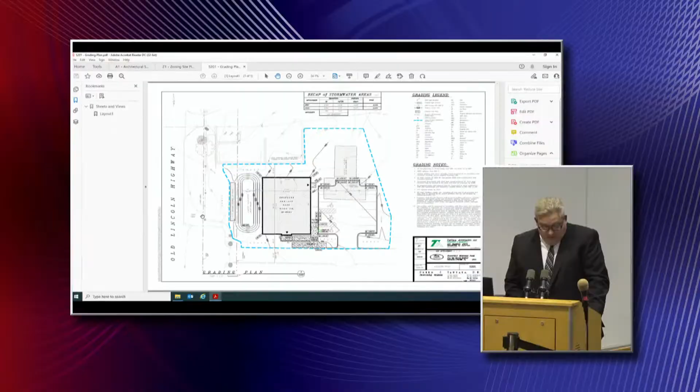However, we did have a conversation this afternoon with Nicole Kahn from Traffic Planning and Design, who indicated what some of the design review comments may be. They sound like they would substantially be items that the owner would agree to, and would be all will-comply items. However, without a letter in hand, we don't want to commit to full will-comply until we have a written letter.

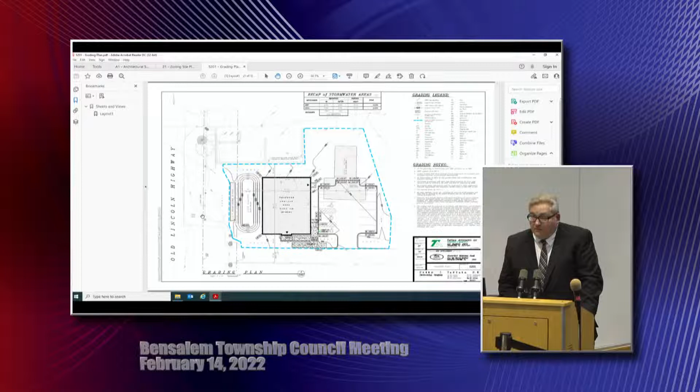Why don't we have a letter? I don't know, we have a letter in our packet, I'm not sure why it didn't get through. Can you give it to them and let them go through it? I'm looking that up right now—there are cleanup matters involved with the review, but no problem with any of it. So the will-complies would have been appropriate for the existing letter you have, and I'll make sure to send it over right away. Can I ask the date of the letter? Here, I'll give you mine. February 4th—look at mine and go from there. How's that sound? At least you can do this legitimately.

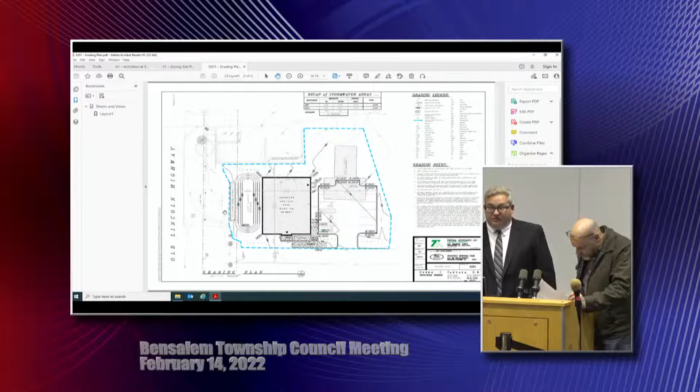One item conveyed to us was that a portion of our stormwater basin, the overflow spillway portion, although on our property, does extend into the ultimate right-of-way of Old Lincoln Highway. One request is that it be pulled back approximately 5 feet so it does not encroach into the ultimate right-of-way. That seemed to be the most substantive item in the review letter, and that's a will-comply—we can either restructure the basin or relocate that facility slightly.

Just out of curiosity, how old is the existing building you're replacing? Extremely old, very, very old. I've been in the cemetery, I think it's a very old building. And it's conditioned upon you—when you build the new building, you're required to knock down the other building, right? Right, because we don't want it built and then kept as a storage shed or something. That's not in the plan. Yeah, it's done, right? She's had enough. The letter's right there—you're looking forward to it, right?

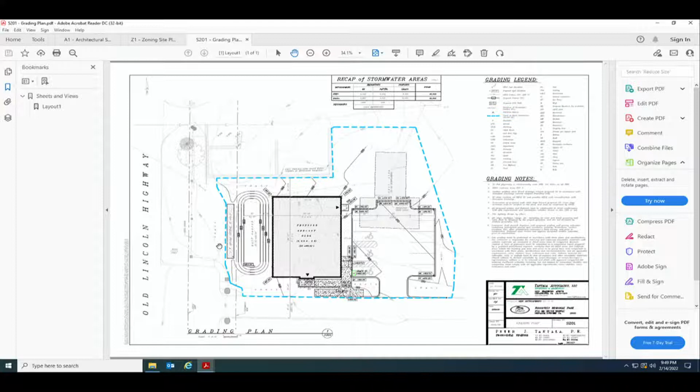Okay, it seems pretty simple to me, Phil. Am I missing something? The biggest thing is that there are some plan parts missing that we're going to need for final plan revisions, which is normal. Things like the erosion and sedimentation plan, the grading plan, and the landscape plan need to be submitted.

Do you think we should just table this until they submit it? No, if they will comply with our letter, then they'll take care of it and it'll be done. There's really no hardship associated with any of the comments we have. Normally we'd have that stuff, but I think it's a minor thing to look at here.

We would request maybe 2 or 3 minutes to confer with the owner, just to review the letter in all fairness. Okay, yeah, that's appropriate. All right, go ahead. Thank you.